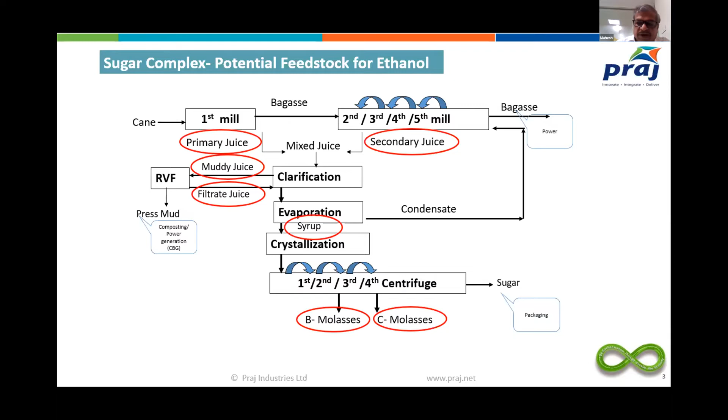As rightly mentioned by NM sir, we are focusing on sulfitation and defecation as the modus operandi of the sugar complex, and perhaps focusing on the impact of these on the fermentation process. But that is not the case. I will discuss this in the slides going forward.

So let's understand the drivers for sugary streams to the ethanol complex. Very much focusing on Atmanirbhar Bharat, the driver is E20 and beyond. Doubling the farmers' revenue, attaining energy security, reducing the import of crude, and most important, reduction of 1 billion ton of greenhouse gas emissions by 2030.

The challenges faced by the sugar industry are the availability of feedstock, surplus sugar and volatile market dynamics. Almost 6 million metric tons of surplus sugar is available, and there is volatility in market dynamics, especially the price of sugar. Diverting syrup to ethanol is very attractive if the price of sugar is below 32. But when the price is fluctuating between 34 and 37 rupees as on date, how would the market dynamics give a preference for sugarcane syrup?

Third, very well expressed by the sirs, is the higher consumption of supplementary fuel when diverting sugar-rich raw materials to ethanol production, because our distillery complex has been optimized based on the steam and power required by the distillery. The most important is the contamination of the syrup. Also, in the case of syrup, unlike B heavy molasses or C molasses, the spent wash generation is higher if you are not recycling this spent wash back into the process.

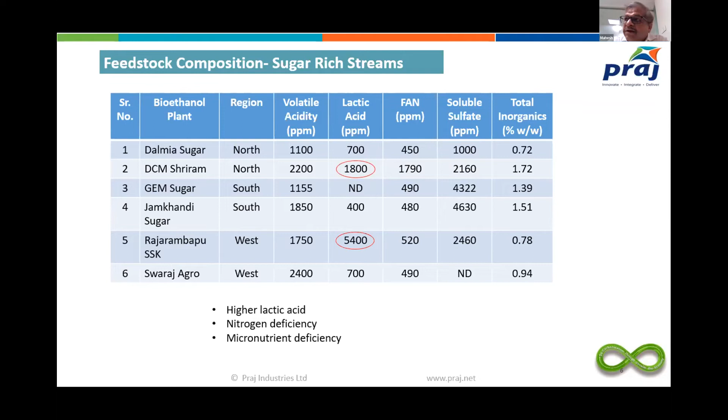Today, in case of the syrup, unlike C molasses or B molasses, we are targeting a minimum 14% to 15% v/v ethanol titer in the fermenter. So when we are targeting higher ethanol concentration, we have to very much focus on the yeast growth kinetics and the production of the ethanol. So the most important things are higher lactic acid, nitrogen deficiency, and micronutrient deficiency. These are the critical parameters in case of the syrup.

That results in reduction of the alcohol concentration, higher spent wash generation, higher supplementary fuel consumption, as rightly mentioned by sir, and frequent corrosion in the distillation. We have noticed in some syrup-based ethanol plants an increase in acidity that causes corrosion in the downstream operations. An extended time cycle in fermentation again increases acidity because of bacterial contamination, as well as deterioration of the congeners in the fermented wash.

Ultimately we have to produce the ethanol for blending in gasoline. But again, the congener profile is very important when we are experiencing higher fermentation time. So all these are critical issues which have an impact on the variable cost of production. This will increase your nutrient consumption, your yeast supplementation and other things.

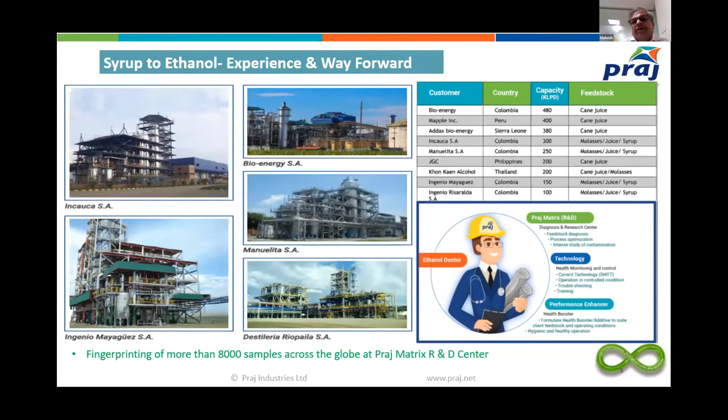So having experience in the operation of many ethanol plants in India as well as in the international market, we have fingerprinted many syrup samples and other sugary samples at our Praj Matrix R&D center, and that helps us in innovation and new technology development. So coming to today's topic, now I shall be focusing on the BIOSYRUP technology.

The problem statement here is: for round-the-year distillery operation, can we store the syrup? We have seen in the various options mentioned by NM sir that we can store B heavy or C molasses for round-the-year distillery operation by diverting syrup in the crushing season. But do we have any option to store the syrup itself during the crushing season?

So yes, for storing the syrup, the most important challenge is the higher water content in the syrup. That attracts contamination, and that disallows us from storing the syrup in the storage tank. So we have to remove the maximum water in the syrup. But can we do this?

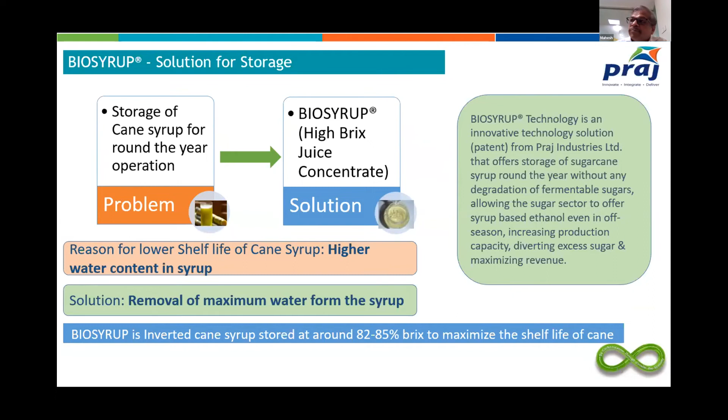Because if we concentrate the syrup, there is a possibility that the sugars will crystallize and we will not be able to store the syrup. So basically, this BIOSYRUP technology is the inverted sugarcane syrup, which can be further concentrated up to 80 to 85 brix, for maximum shelf life of the cane. So here we are reducing or removing the water in the sugarcane syrup, but disallowing the crystallization of the sucrose or the sugar.

So what are the various technologies available as on date to do the inversion? Acid hydrolysis is the conventional technology, because in the laboratory also we do the TRS analysis and we do the inversion by using the acid hydrolysis. In case of the acid hydrolysis, there is a loss of sugar in the inversion process. It also demands neutralization if we want to use the acid as a hydrolyzing agent, so we have to add the caustic. There are chances of caramelization because it's a high temperature reaction, and that generates other congeners like furfural and hydroxymethylfurfural and other things.

So Praj has selected the enzymatic process, which is a green technology, which ensures no loss of sugar and lower cost of inversion. It doesn't demand neutralization like the acid hydrolysis. Being an enzymatic or a bioprocess, it always runs at low temperature, so no chances of caramelization, and the process is very simple.

So in this BIOSYRUP technology, we have the sugarcane milling section. We are preparing the sugarcane juice, then it is treated chemically, liming and sulfitation, and then we go for the clarification and we produce syrup at 55 to 60 brix in the evaporation section. Here we have a unit operation that is Praj's proprietary technology, the invigorator. Here we are adding the enzymes, water, syrup, and it gets conditioned.

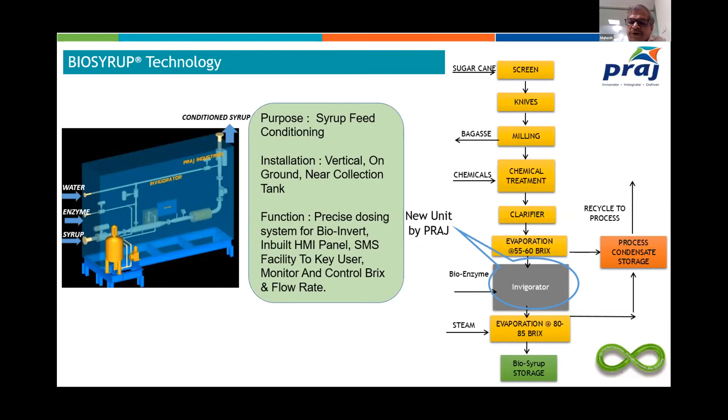The syrup gets conditioned, and basically this is a precise dosing system with an SMS facility to key users. So it is well advanced in terms of the information technology we have used, which gives advantages to the project developers. And the most important thing is we are further concentrating the processed sugarcane syrup after inversion. We are further evaporating to 80 to 85 brix, and then it goes to the storage section.

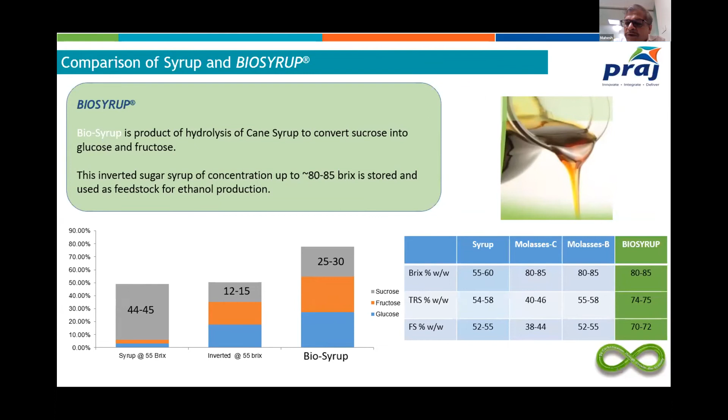So let's compare the quality of the syrup and the BIOSYRUP. In case of the syrup at 55 brix, the sucrose content is about 44 to 45%, and balance is fructose and glucose. In case of the inverted syrup at 55 brix, 12 to 15% is sucrose, and rest is glucose and fructose. And in the BIOSYRUP, we are targeting 25 to 30% sucrose, and balance is glucose and fructose. In case of the BIOSYRUP, the total solids or brix would be around 80 to 85, the TRS would be 74 to 75, and fermentable sugars would be 70 to 72.

Now coming to the effluent characteristics in the sugar complex in context to the feedstock: typically with C molasses, we can target 8 to 9% alcohol, but we cannot do vinasse recycle or spent wash recycle because of the higher solid concentration as well as the volatile acids. Initial solid concentration in the effluent would be 16 to 17%, and spent wash generation would be 9 to 10 liters per liter of alcohol. After evaporation, it would be 2.8 to 3 liters per liter.

In case of B heavy molasses, there's an opportunity to recycle the spent wash because of the higher F/N ratio. 25% of the vinasse can be recycled back into the process, and ultimately at 60% solids concentration, concentrated vinasse would be about 1.7 to 1.9 liters per liter of alcohol.

In case of the juice syrup, again because of the higher F/N ratio and the opportunity to recycle almost 50% of the vinasse spent wash back into the process, we can achieve almost 0.3 to 0.4 liters per liter of concentrated vinasse. Same is the case with the BIOSYRUP. Here also there's an opportunity to recycle almost 50% of the vinasse, and we can achieve 0.3 to 0.4 liters per liter of concentrated vinasse.

For plants which have biomethanation with zero liquid discharge as an end option, typically in this case the COD would be 8 lakh to 9 lakh, BOD would be 3.5 lakh to 4 lakh, and the solids concentration would be 6 to 7%.

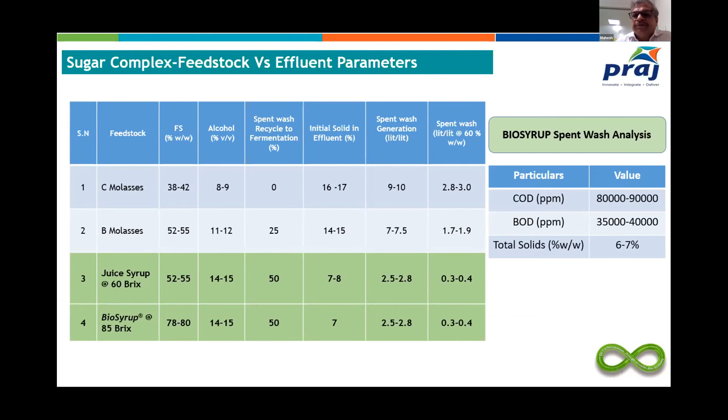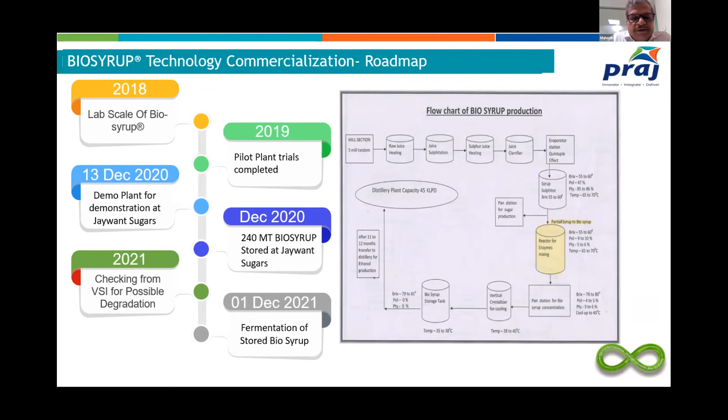Now coming to the BIOSYRUP experience, as far as the innovation and technology commercialization, we started in 2018 with a lab scale for the BIOSYRUP. Further, we moved into the pilot plant scale trials, and in December 2020 we had a demo plant at the Jaywant Sugars, and 240 metric tons of BIOSYRUP was stored in December 2020, and the feedstock composition was validated by the Vasantdada Sugar Institute to see if there is any deterioration of the feedstock during the storage condition. And in December 2021, we did the fermentation of the stored BIOSYRUP.

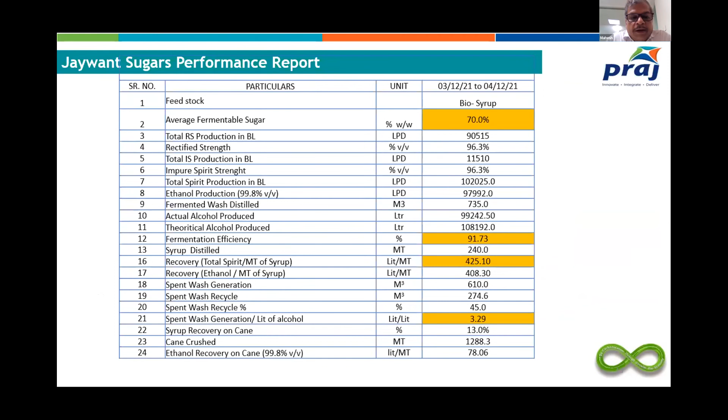So as for the validation of the BIOSYRUP during the storage section, the observation is that there is no deterioration of the TRS during the storage, although it was inverted, means glucose fructose as well as in the syrup. So there is no deterioration. And when it was operated to produce ethanol, typically at 70% sugar concentration, the fermentation efficiency achieved by Jaywant Sugar was almost 92%, and the recovery was almost 425 liters per metric ton of the syrup, and the spent wash generation was about 3.3 liters per liter of alcohol.

So what are the facts and figures about the BIOSYRUP? When we are talking about the bio-inverted syrup, the preservation cost would be roughly about 78 to 80 rupees per ton of cane crushed. Yield of ethanol is 400 to 430 liters per ton of BIOSYRUP. Spent wash generation about 2.6 to 2.7 liters per liter of ethanol. Storage can be done up to 12 months under atmospheric condition and below 40 degrees centigrade. And significantly, we have noticed that there is no loss of sugar during the 11 month storage.

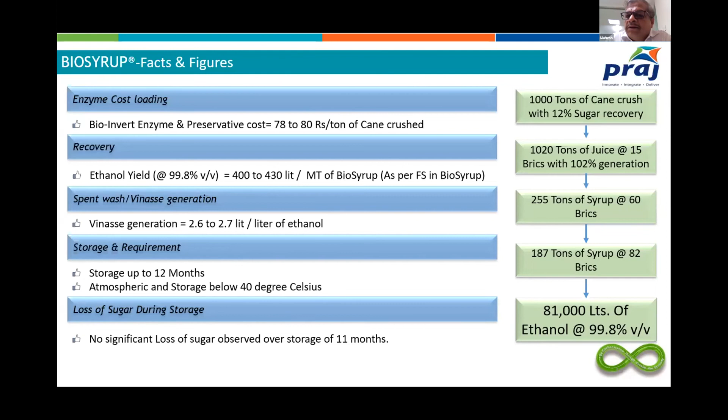So when we are talking about 1000 TCD sugarcane milling, we can produce 81,000 liters of ethanol. Typically, if we are considering a business case of a 100 KLPD distillery complex, we can have 1,250 TCD equivalent for the BIOSYRUP conversion for 160 days. And the balance of the BIOSYRUP can go into the storage section. And that's the way we can run the operation of the 2,500 TCD.

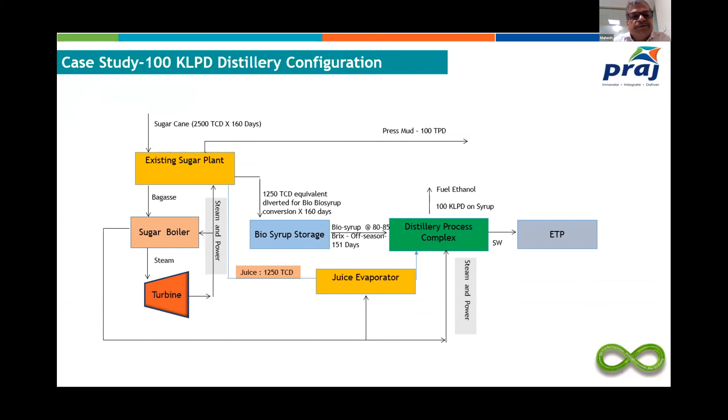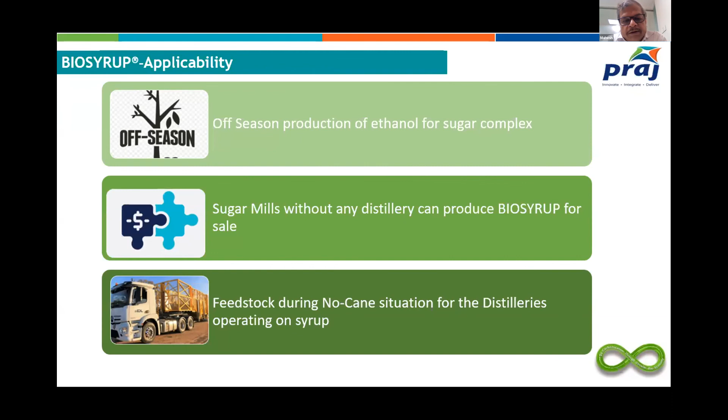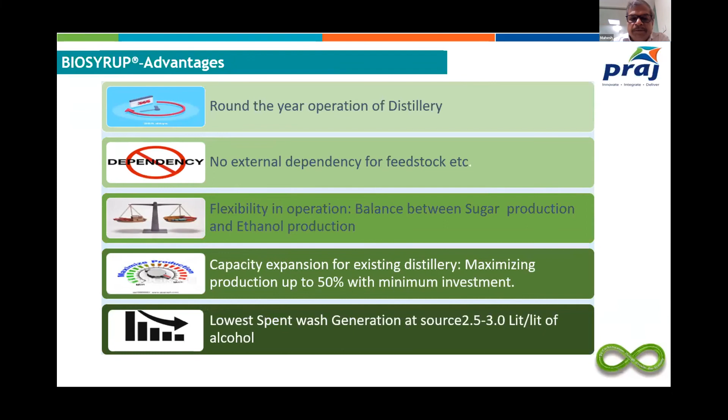Now coming to the applicability and benefits of the BIOSYRUP. Of course, it gives off-season production of ethanol for the sugar complex. Another applicability, sugar mills without any attached distillery can produce BIOSYRUP for trading as well. It's a feedstock during the no-cane situation for distilleries operating on syrup. Advantages of the BIOSYRUP technology are round-the-year operation of the distillery, no external dependency for the feedstock, flexibility in operations so that we can balance sugar production, capacity expansion for the existing distillery up to 50% with minimum investment, and low spent wash generation.